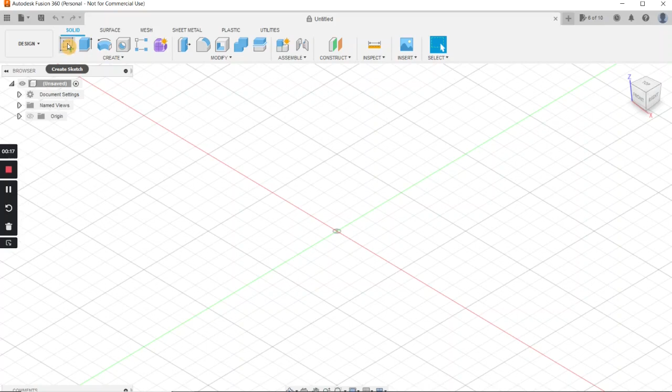Pick the top plane, then rectangle. I know that my box dimensions are 153 by 98. Enter. Gonna finish sketch. Extrude this 3 millimeters, that's the width of my material. Enter.

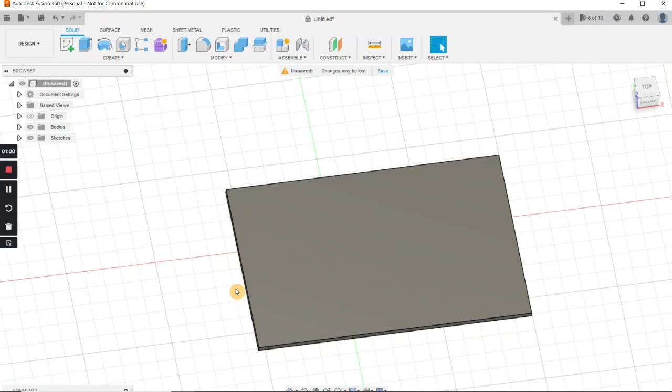Okay, now we'll make the front of the box. Create a sketch, select this plane. Rectangle, we're going to start at that corner. We're going to go 153, and our height is going to be 30 millimeters. And enter.

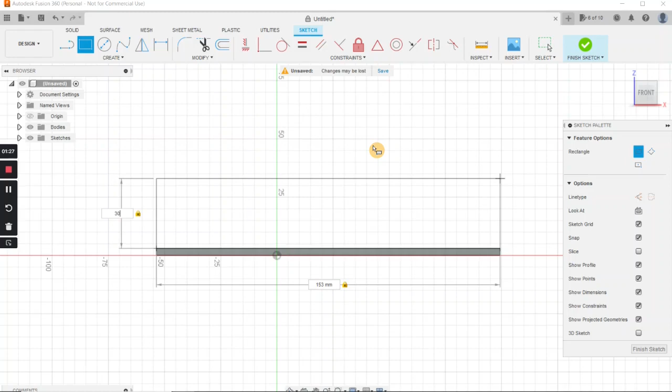Rectangle. Now we're going to create our finger joints here. Let's go 15 by 3, the width of our material. Rectangular pattern.

Select these 3. Oh, come on now. Let's try that again. Rectangular pattern. Select your sides, draw it out to the end. And let's go for 4. Enter. 4 tabs, so we've got 4 tabs there.

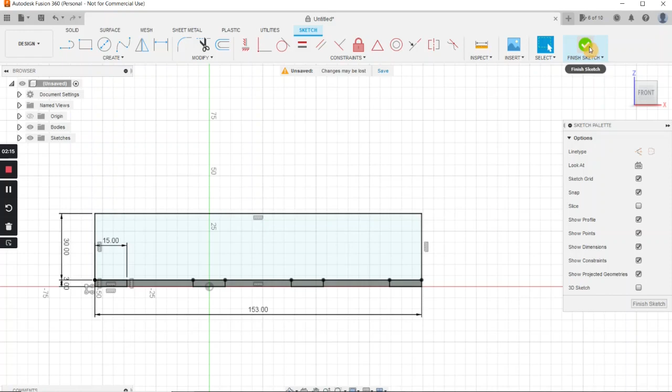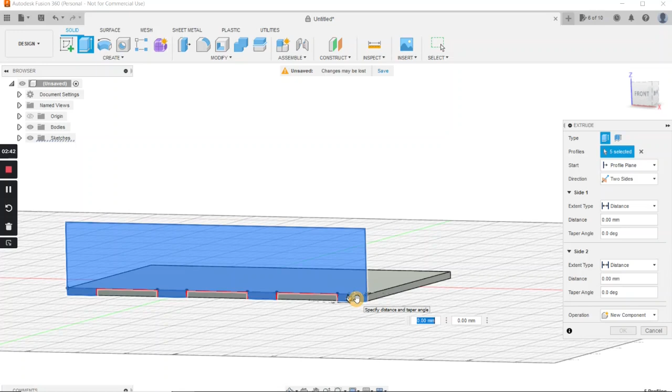Finish sketch. Extrude. And so we'll select 2 sides, create a new component. And let's select our items to extrude. I'm going to select that direction, 3 millimeters, enter. Got a new component, let's rename that.

Box front, enter. Okay, and I went ahead and created a component called box bottom from our body. And so now we need to make our cuts for this, so we'll do combine, and we want to select cut, keep tools, select the bottom first, then this one, hit OK, and you can see we can move that and it's made our cuts for us.

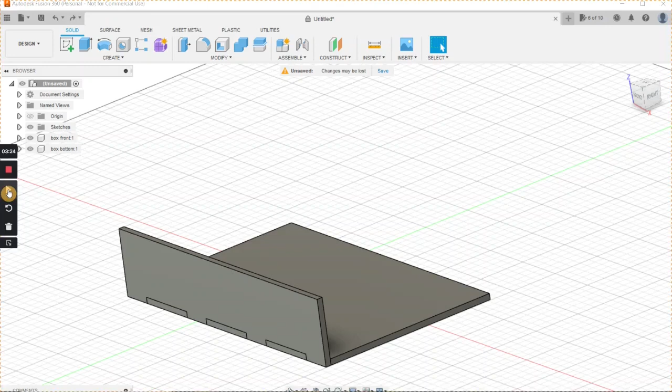Control Z to go back. Okay, now we're going to create the sides. Create new sketch, select a plane, rectangle. Now this is going to be 98, 95. Okay, tab. Now this is going to have to be taller than our front to accommodate our lid.

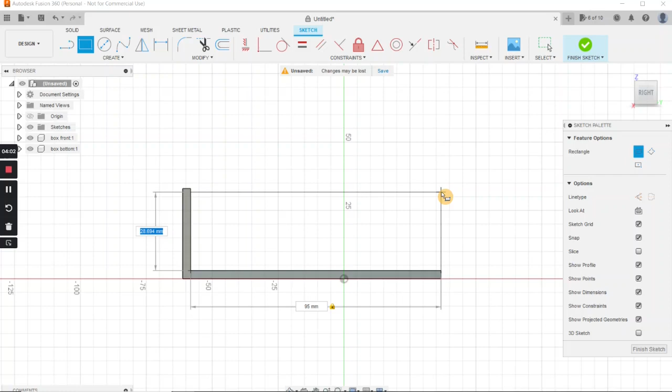So let's see, 36, 37 millimeters. Enter. We're going to create our box joint starting right here. So 3 millimeters by, let's go 8. Enter.

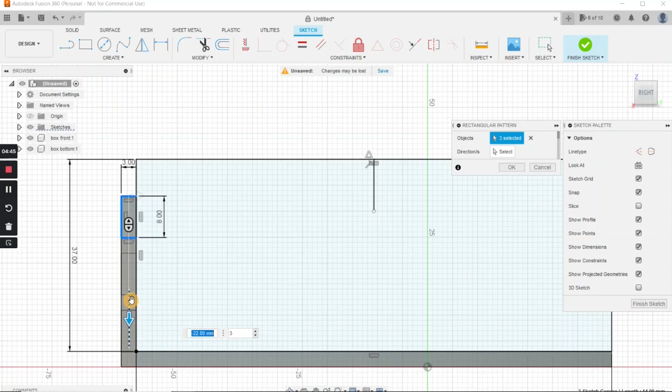Create a center line as a reference. Enter. Rectangle pattern. There, there, there. Bring this down. And hit enter. We're going to have to make these smaller. There, that's better, 5 millimeters.

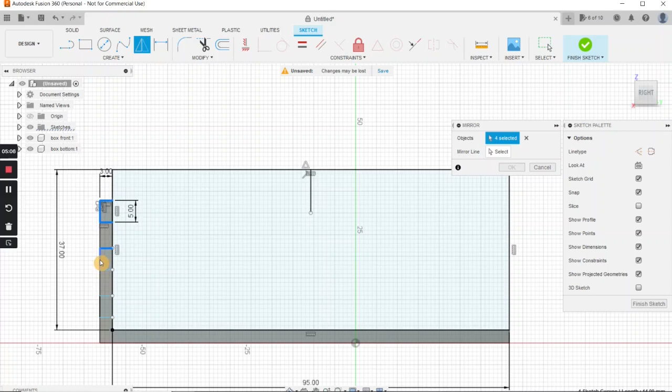Now we're going to mirror these to the other side. Save this a little time. So select mirror line there. Okay, now they're mirrored across. Actually, I do not need to mirror these. Let's Control Z that.

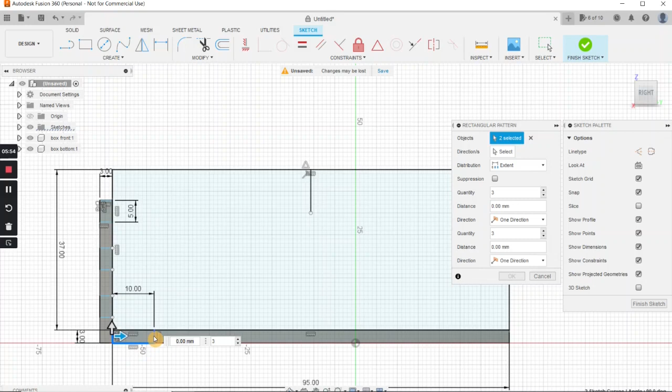Now we'll make the bottom ones. Let's do 15 by 3. Enter. Those are a little large. Let's go 10. Enter. Create rectangle pattern. Drag that across, let's go 4. Enter. Okay.

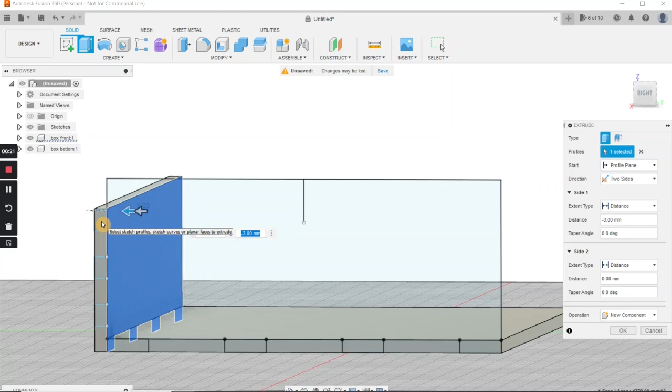Then we're going to finish sketch and extrude it inward. Okay, we're going to pick this, 2 sides, new component, select all the pieces, selected the wrong one. Let's try that again. Extrude, 2 sides, new component, there we go.

There's our 4. We're going to select the other direction, 3 millimeters, and OK. Rename our component, box side, enter.

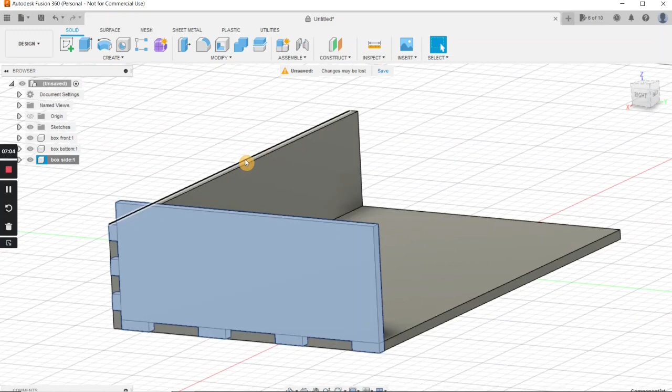Okay, now we're going to copy this to the other side. And so what we're going to do is right click that, copy. Now go up here to our origin point, whatever you'd call it, not sure what you call it. And then we're going to say paste new. And now we can move this.

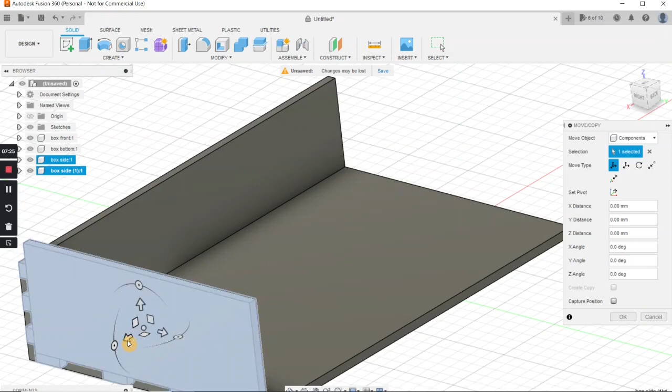Now I know that I want my dividers to be 72 millimeters wide. No, let's do that again. It should be minus 72. There we go, put it where we want it. Hit enter.

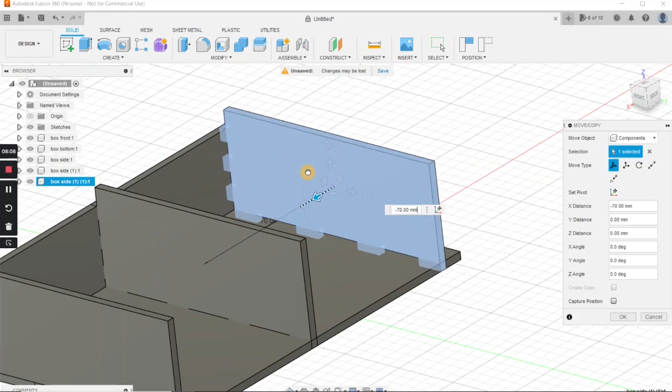And then we're going to do that again. Copy, go up here, right click. Paste new. And then we'll bring this one to the very edge, which we may have to zoom in a bit to get it exactly where we want it. There we go, enter. Okay, and we'll fix this in a second, but let's make our cuts now.

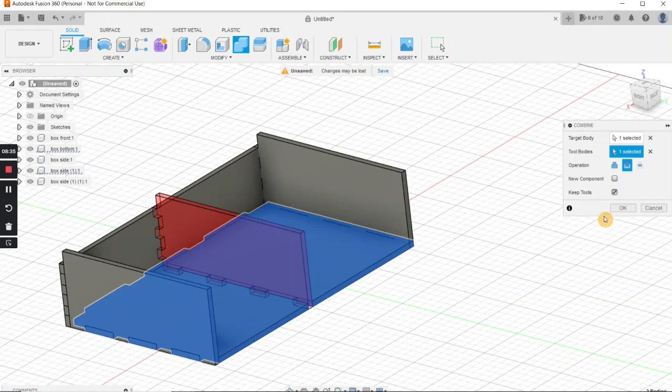Combine, target body, select the bottom here. Okay, combine, select the bottom, middle. You can see it's making the cuts there for us. Combine, bottom. There we go.

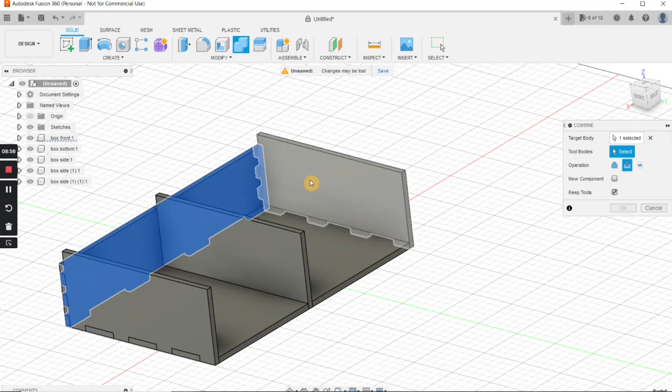And now we need to make the cuts in the front also. Combine, front, middle. Combine, front. Now let's check them, make sure, yep, it did what we wanted. And it did. Okay.

Now this needs to go down, and so what we can do is click extrude, select that face, and bring it down level with the rest of our box. Enter. Perfect.

Okay, I actually made the box a little too short. I meant to make a little 15 millimeter compartment for the little tokens. And so what I'll do here is extrude this 15 millimeters, and I'll do that with the rest of them also.

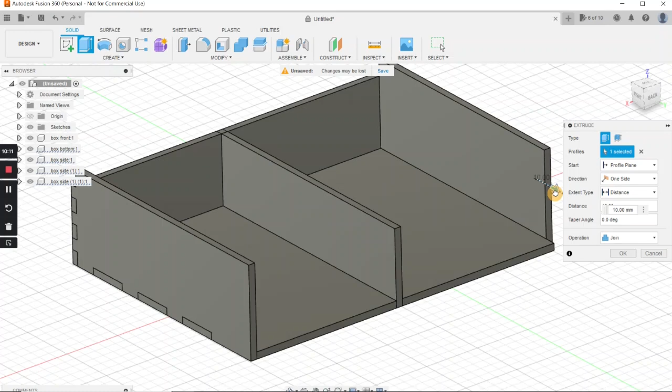And I know that there won't be any box joint on that 15 millimeter part, but I think it'll actually be okay because I'll put it on the backs and in the little divider too. Yeah, because 15 millimeters isn't very much.

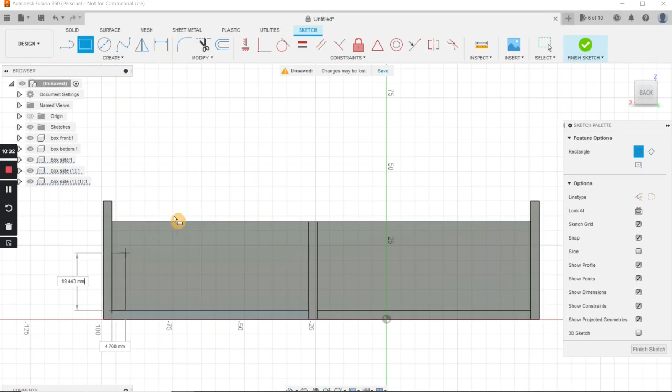So next I'm going to create the back. I create sketch, and I'll show you what I mean. This will tie everything together. Rectangle - we're going to go to the inside, and all the way up to meet this corner here. Needs to be perfectly lined up. There we go.

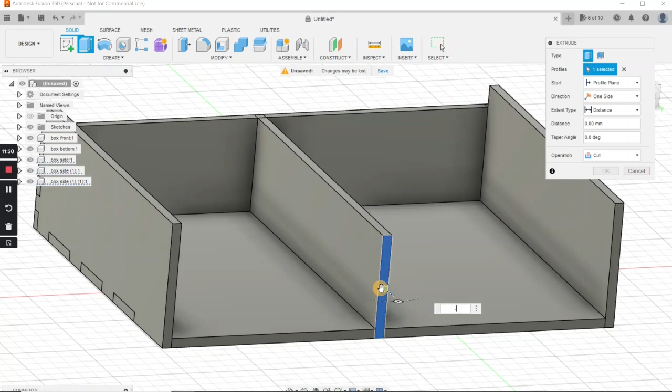And then we're going to make our finger joints. Or actually, let me do one other thing - let me Control Z that, because I actually have to back this up and put finger joints on it. I'm going to have to back it up by 3 millimeters. And then we're going to have to put some finger joints on it.

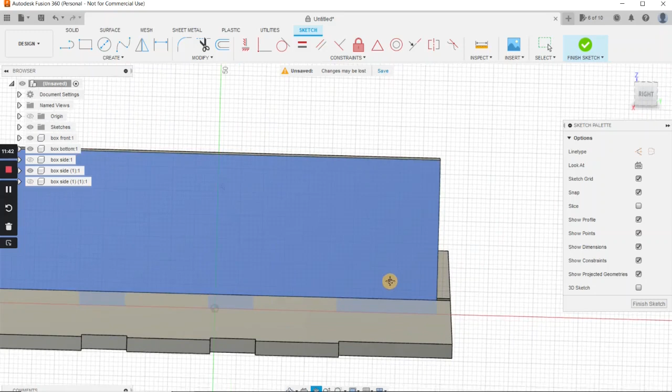Okay, is that the one? Yep, that's it. Okay, so we'll start here. Go 3 by, let's do 8. No, let's do 5. Create a rectangle pattern. 1, 2, 3. Slide that down to there. Finish sketch.

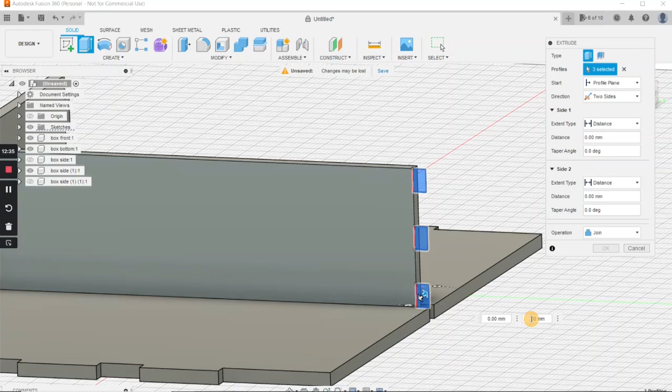Then we'll extrude that. We're going to go to the other side, and we're going to join these because we want it to be part of this. Negative 3. Okay, there we go. There's our finger joints we were looking for.

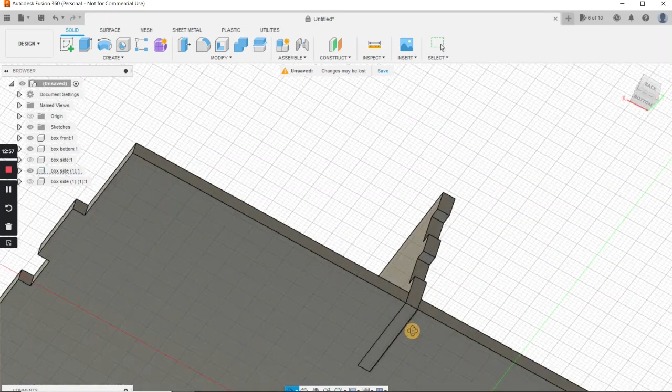It doesn't work, so we'll hit E for extrude. Bring that down and enter. Perfect. Make sure our cuts are made correctly. Okay, and they are - good, perfect. Now we'll pop those back into existence.

Now we'll create our next sketch on the back side. Rectangle. So go to the inside and then back to here. Come on now, there we go.

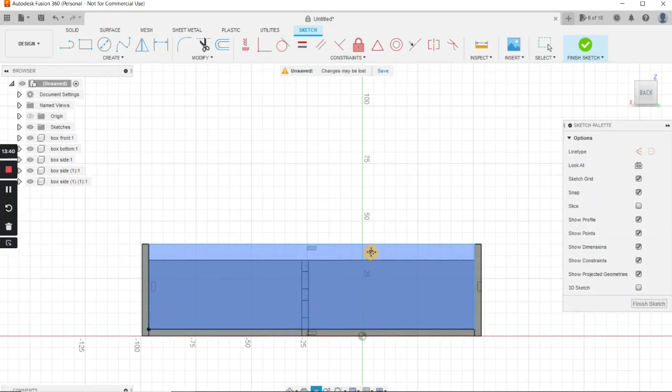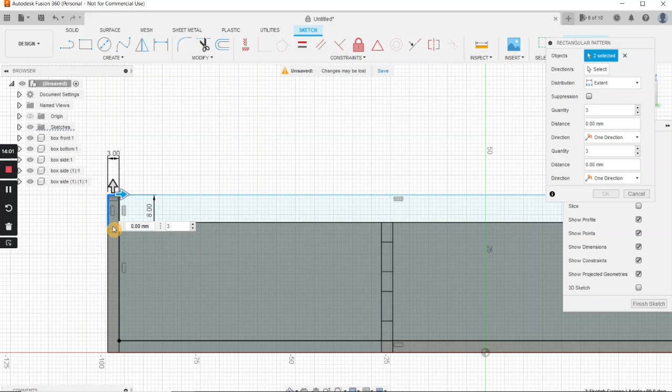And finger joints. So we'll do 3 by 5 - no, by 8, that works. Rectangle pattern, 1, 2, 3. Go down. Create a line. Reference line. Escape. And then we'll mirror these.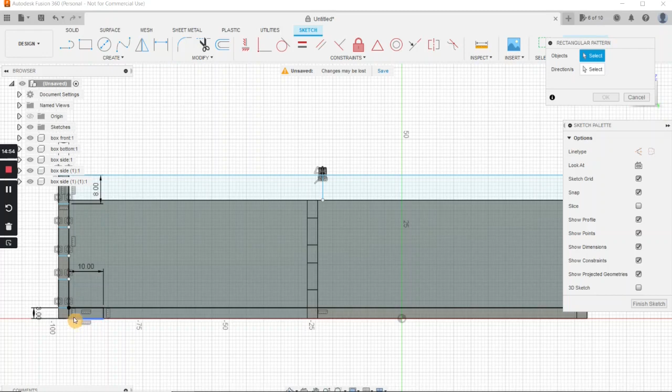Select our mirror line. Okay, perfect. Okay, now we're going to do 10 by 3. Rectangular pattern. 1, 2, 3. All the way across.

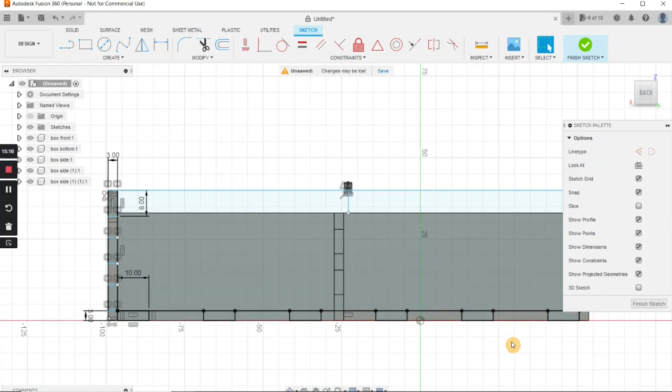And let's do, what if I do 5? If I do 6, 6 looks good. Now we're going to finish sketch, and we're going to extrude that. Be sure to select everything correctly.

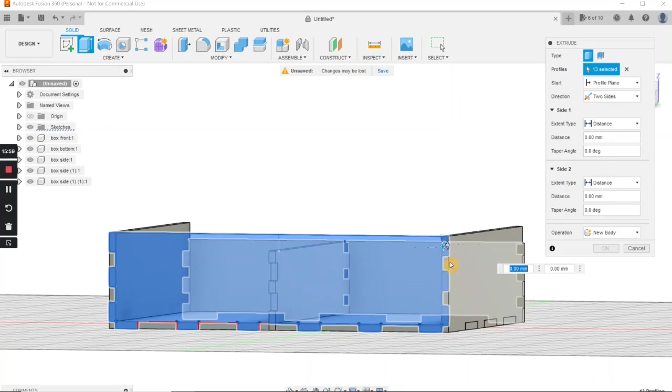Okay. Gonna be 2 sides. To select that direction - 3 millimeters, and that's going to be a new component. Okay, new component, rename - Box back. Enter.

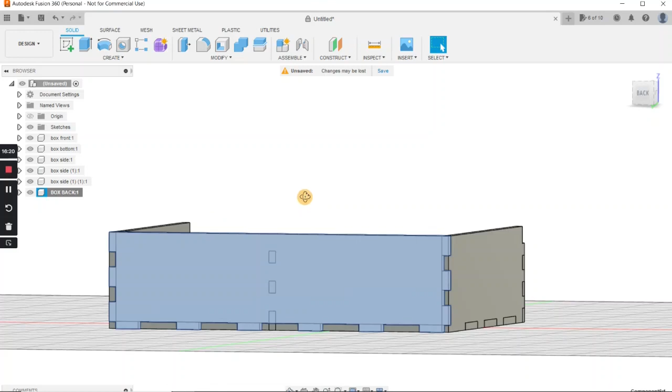Looks good, so now let's make our cuts. Combine - select the bottom, the back. You can see it's making it where you want it. There. That is not correct - you can see I selected the wrong order. So let's cancel that. Combine. There we go.

Combine - back. Okay, we'll move it up. Make sure - see, we forgot that one. Nope, let's do that the other way, to the back in the middle. Perfect, let's make sure it made that cut. And it made those cuts.

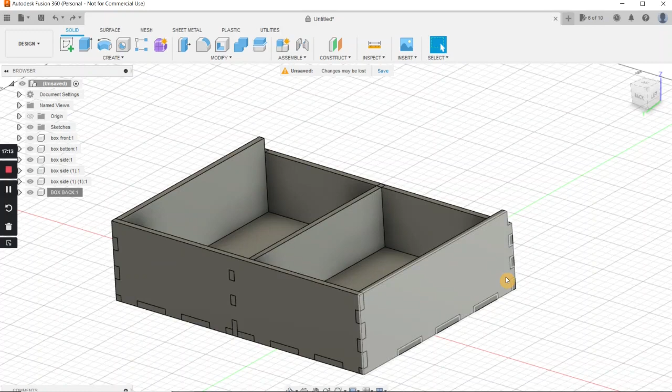Perfect. Now we want a second divider in the box for our little tokens, so I was talking about. So we're going to go to our box back, right click, copy, come up here, paste new.

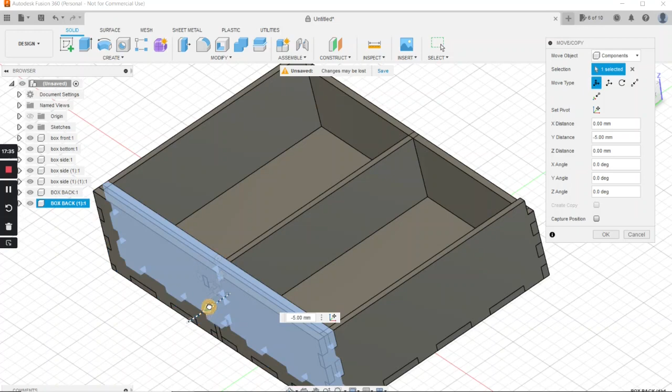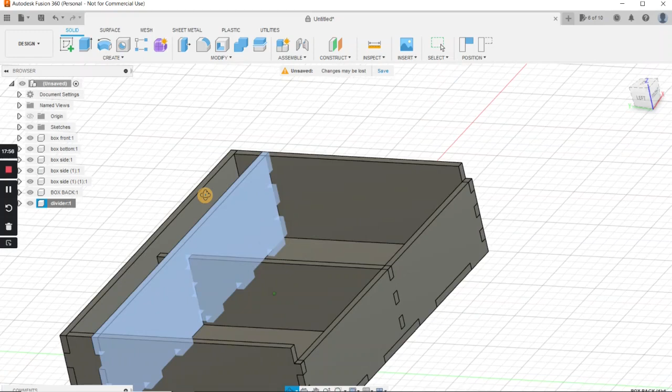We're going to move that 15 millimeters, hit enter. And we can rename that if we want - divider. Okay, but we need it to be the same height as this. So we can extrude, capture position, and we're going to bring that down level. Okay, let's zoom in, get it where we want it, right there, enter.

Okay, now we're going to have to make some cuts for this. Looks good. Combine. Okay.

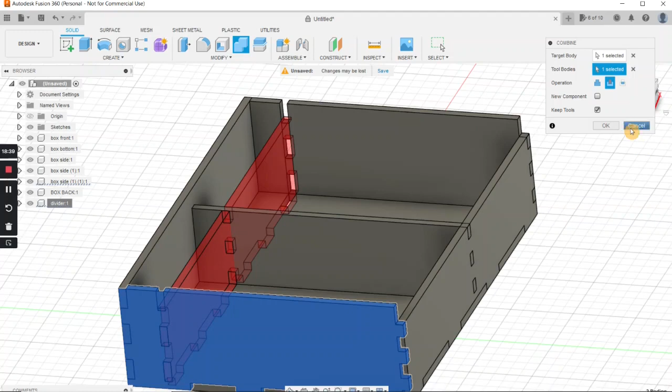Combine. I think that did it. Let me make sure. It did. Our holes did not quite cut completely.

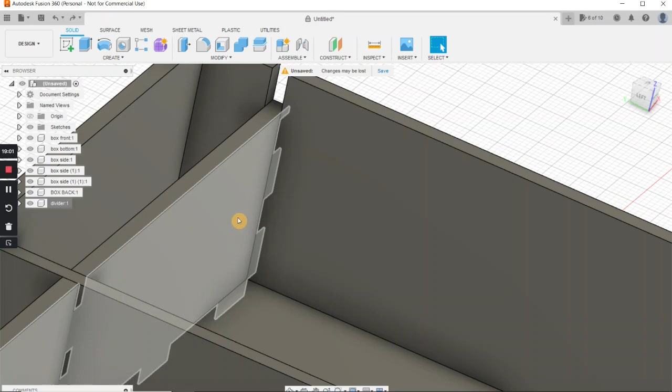What we'll have to do is hit M for move. Oh, that's not what I wanted. M, and we want to move components. This, we're going to move it up, straight up. Enter. We want to close these holes up.

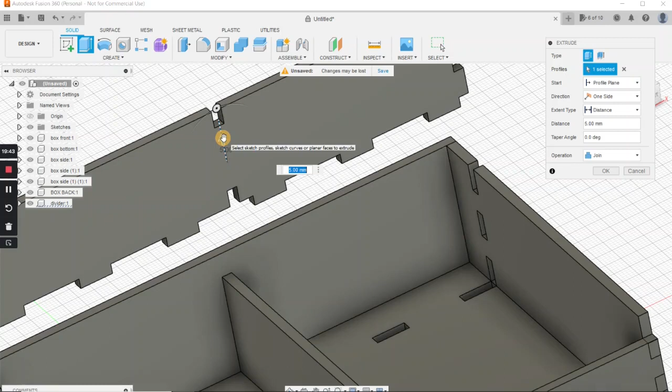E for extrude. So just do that. Oh, no. There we go. And we got to unjoin. Same thing for this. Okay, same thing for the bottom one.

See if I can do it from here. Yep. Here we go. Enter.

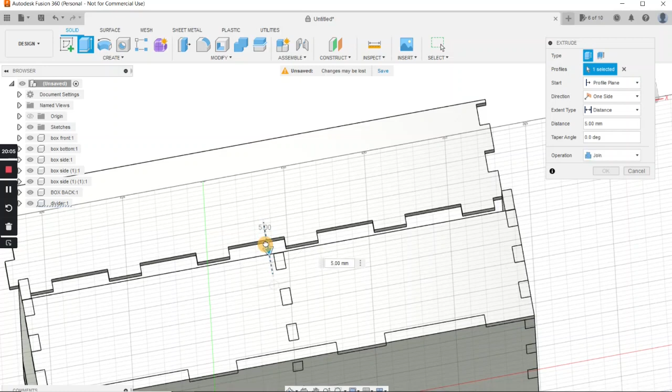Now we're going to have to do this divider here differently. The way to do that is, let me measure this, the height of this divider from there, come on, to there, 30 millimeters. I'm going to have to go down 15 millimeters and make a cut between these two, because that's the halfway point.

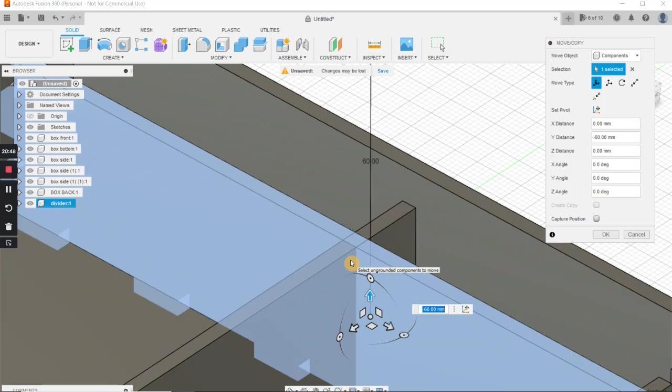So M for move. We're going to move this down till it's sitting in place. That looks correct. Now M for move, we're going to move it up 15 millimeters.

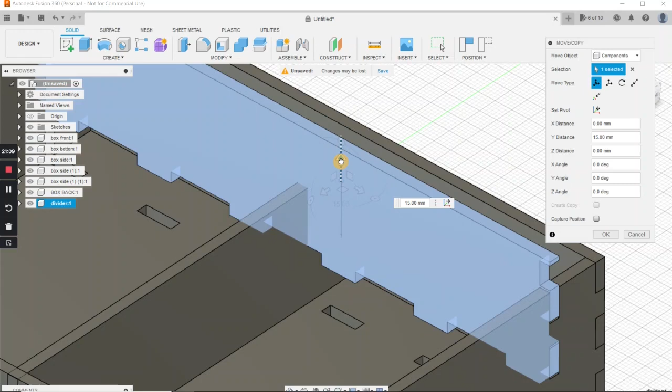Now we're going to make a combined maneuver between the two. Let's see, it's making a slot for us. Now let's see. It did on that one. I did that. It made the cut there.

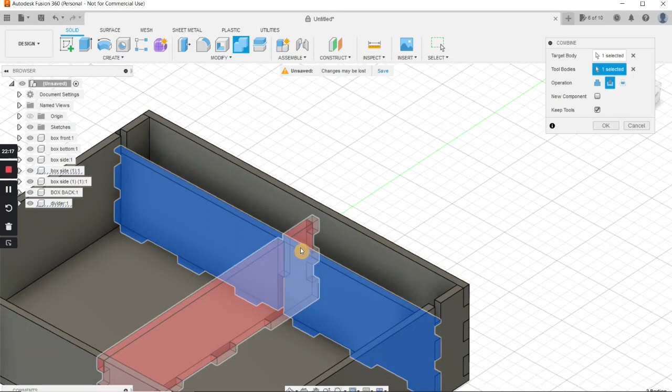So now what I have to do is hit M, move this back down in position, which looks right, and now do the combine again. Nope, let's go the other way with it. Right here, in here, then it's going to make the rest of our divider.

Now you can see we have our slots there. That made all my cuts. I'm going to move that back into place.

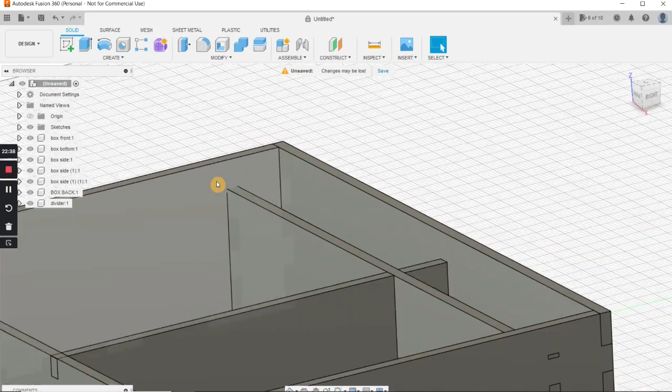Okay, now I'm closing these off. E for extrude, close these off, and now we have to make sure our cuts are made there. Let's pull it up, make sure, and it is.

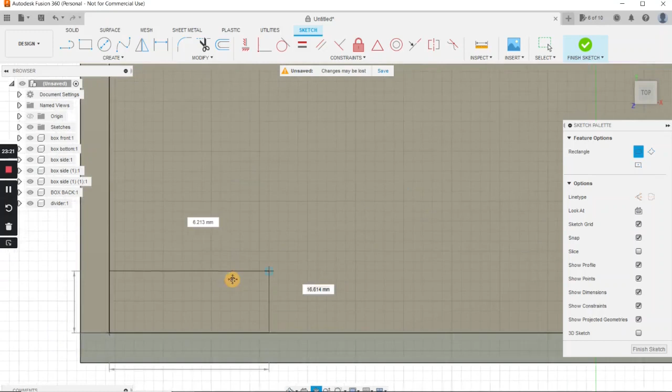Okay, now we're going to make the lid. So we're going to create a sketch, rectangle. It's going to have to track the inside of the box. So we'll start, let's get it right in the corner. We're going to go all the way to here with it. Perfect. Enter.

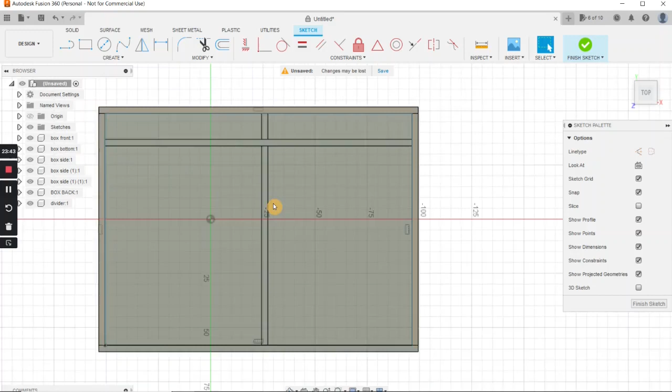We're going to extrude that. Finish, extrude, 3 millimeters. New component. Rename that, lid.

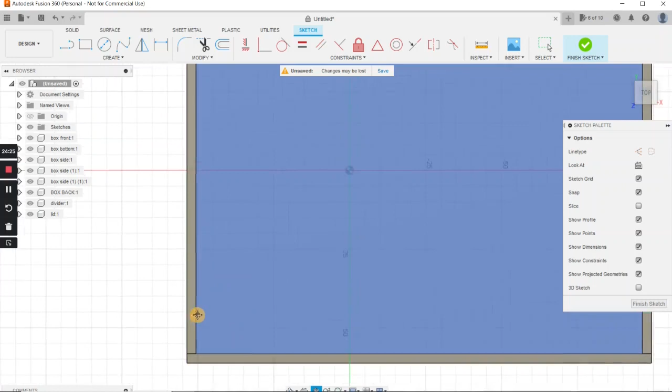Now we have to make some holders above and below this that will snap into this. So now we're going to create a sketch on this face, and we're going to make a rectangle.

What we can do is let's just make it 3 millimeters wide. It doesn't have to be very wide. And tab, 108, no, so it's 107. Okay, now what we have to do is create finger joints here.

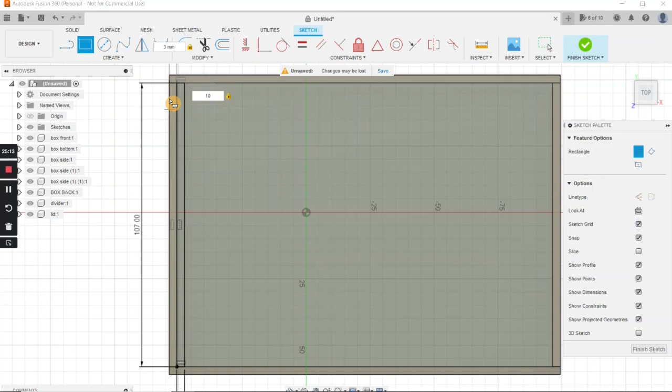So 3 by, let's do 10. Enter. Create a rectangle pattern. There, there, there.

We're going to go all the way down here. We need it to be right there. Let's go 6. Enter.

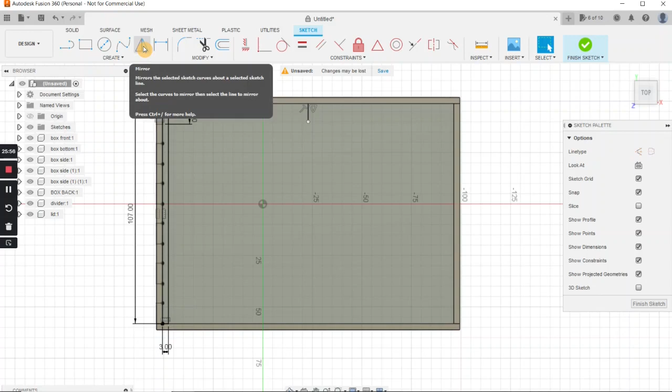And we might as well mirror this. Let's see if we can find, there it is, our center point has the triangle. Escape. Mirror this. I'm going to pause it while I mirror it. Alright, made these on both sides.

We're going to finish sketch. Extrude. Got a lot to extrude. Nope, let's cancel that. Extrude. There we go.

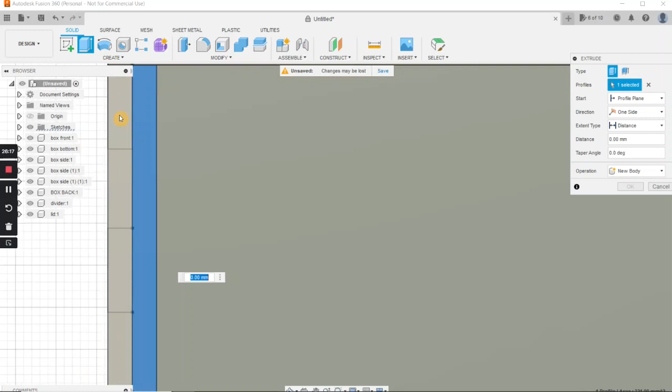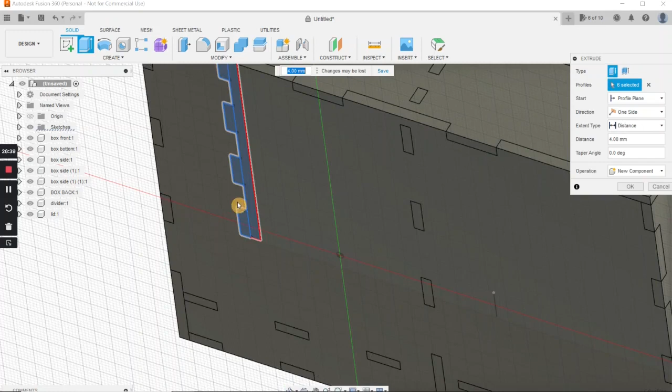It's trying to cut, we need new component. And you can hit Shift. Oh, no, that's not what I needed to do. Totally messing that up.

Okay, then the other side also. And we want that to be 4 millimeters. And that is correct. New component.

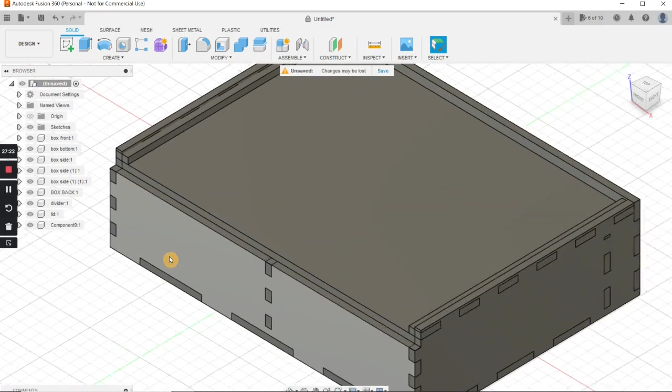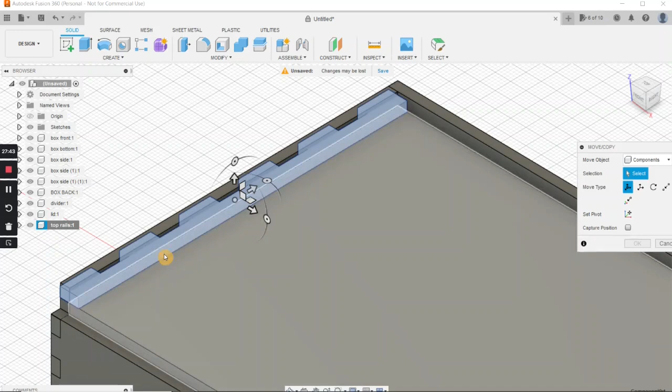Now it needs to be flush with this. So we're going to rename that rails, top rails. Okay, hit M for move. We're going to move it up, and it will probably move the other one too. Enter.

Okay, now we have to join this and then that piece. And so what that basically did was allow us to do this. This needs to be cleaned up a bit, which is pretty easy. Just extrude E backwards to cut those out all the way.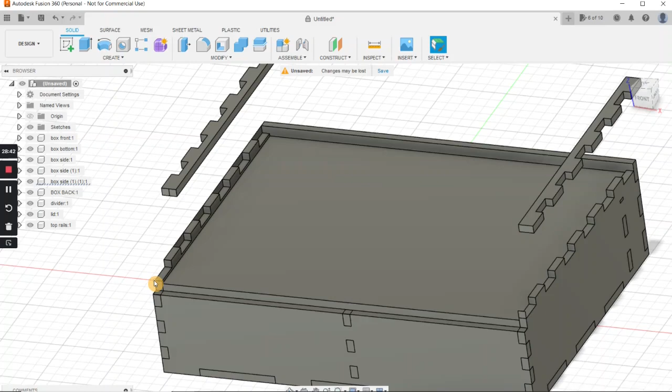I'll pause that and do that. And just to show you, you can do them all at once by hitting Shift.

Now we obscured our lid, because we need to make some rails below the lids for it to sit on.

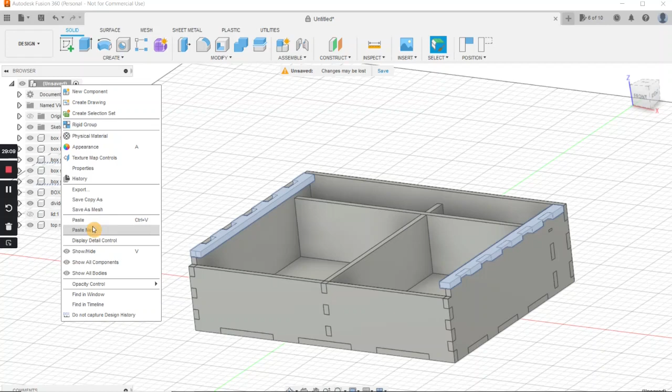So here's our top rail: right click, copy, go up here, paste new. Let's zoom in. We're going to bring some other rails right down here, and it's got to be level with the front of the box. That looks correct. We'll hit enter, then do the same thing on the other side, so let me pause that.

Okay, I did it on the other side, so now we're going to make our cuts on this, just like that, and that, and that. We're going to move that out and make sure it cut correctly. Looks like it did.

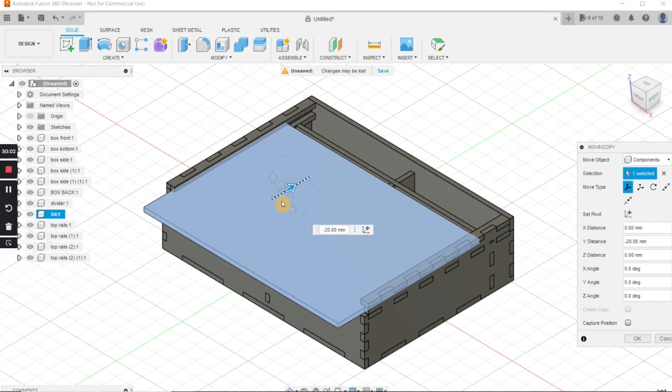Control Z. Okay, we put our lid back if we want, see how it kind of looks. And you can see our lid would then slide out just like that. If I made it correctly, there's about 1 millimeter of difference of clearance, and that would hopefully be enough.

So what I'm going to do is lay all these pieces flat and get it ready to export to a DXF file.

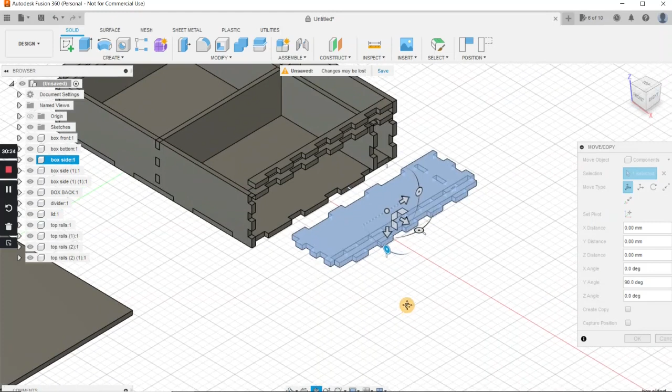Here's a tip on getting something to go flush with the bottom. So I moved it out, right? Then what I can do is click point to position, click a point, then go here to the position Z, put in a 0, enter, and it puts it flat on the floor basically.

So to get ready for LightBurn, we're going to hit P for projection. Let's try that again.

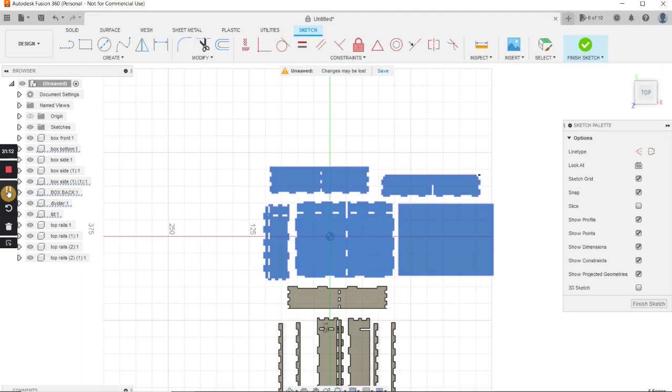Okay, now we're going to select a plane. Now hit Shift, and we're going to select everything on here to make a projection of it. I'll pause this while I do so. Okay, so I've done that. Here's our projection. We're going to hit OK. It's got everything outlined in purple.

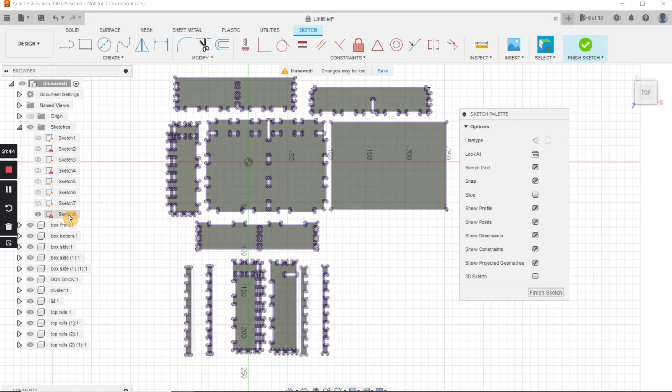Did we catch that? Let me make sure we did. Okay, that's okay, now it did. So now we go to sketches, and it looks like we did capture all of it on the first one.

So we'll right click sketch 8, save as DXF. We'll call this Battle line box, and we'll save it right here. Well actually, let's go up here to LightBurn, board game stuff, create a new folder, Battle line, and we're going to hit OK, and we'll save it there.

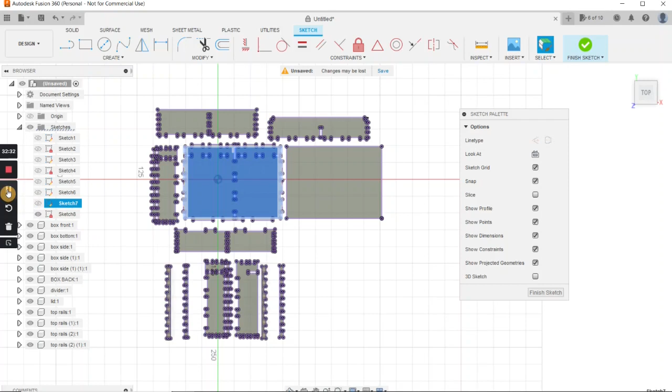Pause this, and we should actually save this also. I should have done that from the beginning, to be honest with you.

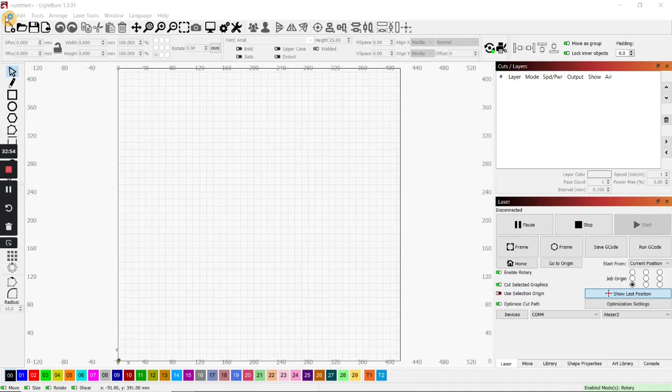We'll close this up and open LightBurn. Okay, now we're in LightBurn. We're going to open desktop, LightBurn, board game stuff, Battle line, and we have to select all supported.

There's our DXF file. Well okay, so what I need to do is get the other one because that did not work. Okay, so let's open, all supported. And there we go, that's the whole thing.

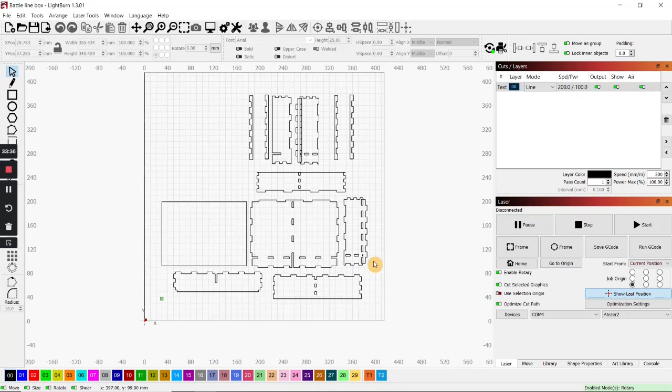Perfect. And now what we can do is clean a little bit of this up. So sometimes you can join these shapes, sometimes you can't. If you can't, what you end up having to do is select this little icon here and put in your own points that you can cut from.

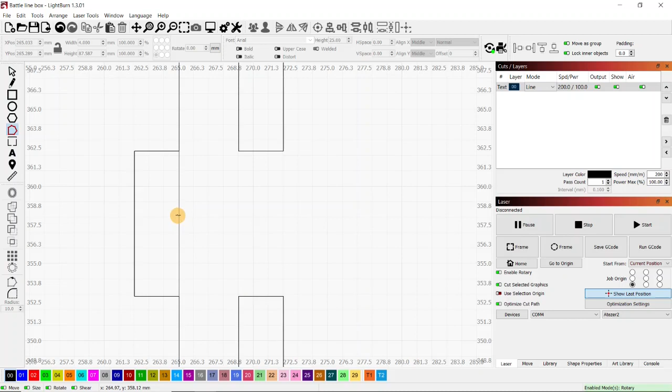Looks like I made some duplicates. So I for insert, B for break. I for insert, B for break. You can click in the middle and see I've got it highlighted, and then you can cut it out. So I'm going to have to do that with all of these.

I'll pause that and do that. Okay, so it's all cleaned up now, ready to go, and all I have to do is put some sort of ornamentation on the box.

Okay, so here's the final insert in LightBurn with the ornamentation on it. I also, this little area right here that holds the pawns, I had to widen that by about 5 millimeters. I messed up when I made it in Fusion 360. I also had to widen the lid 5 millimeters as well as the sides.

And so then we would just hit start and cut this and put it together.